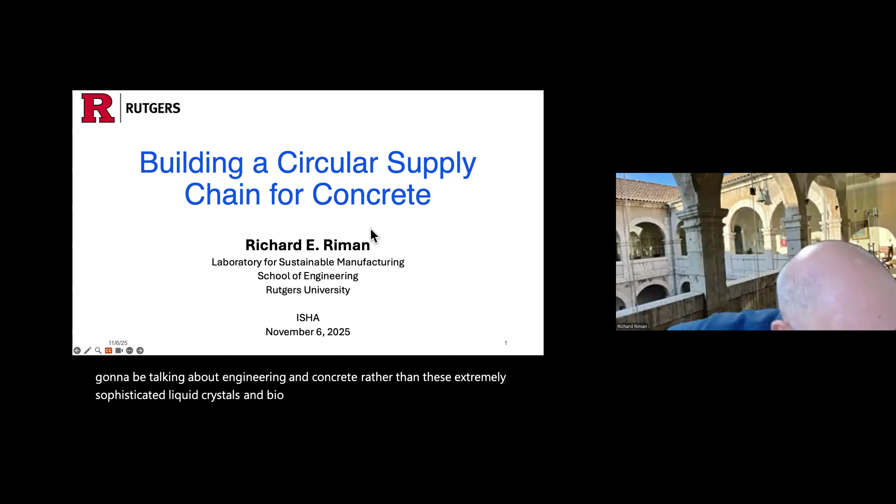I'm going to the other side of the spectrum here. I'm going to be talking about engineering and concrete rather than these extremely sophisticated liquid crystals and bio nanoparticles and enhanced solar absorbing materials. So let's go straight to first what the problem is that we're trying to solve.

As you've heard from our distinguished president of the United States, he thinks climate change is a hoax. So I want to first just talk about that for a moment.

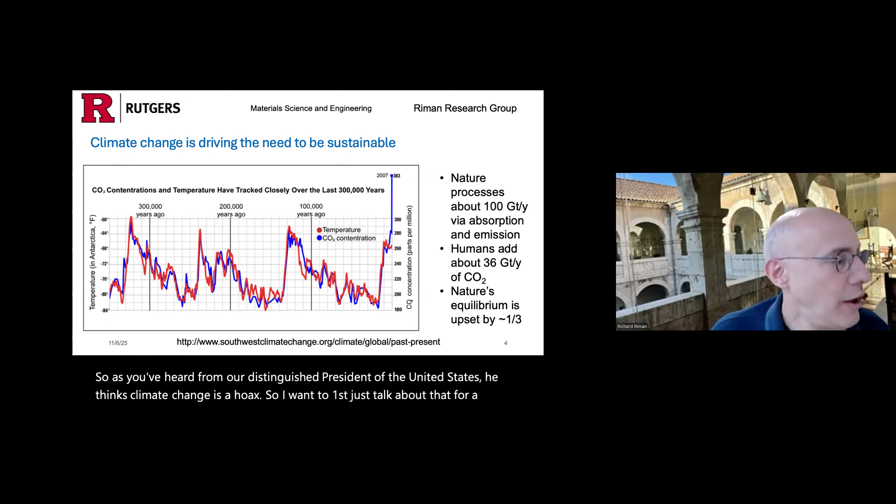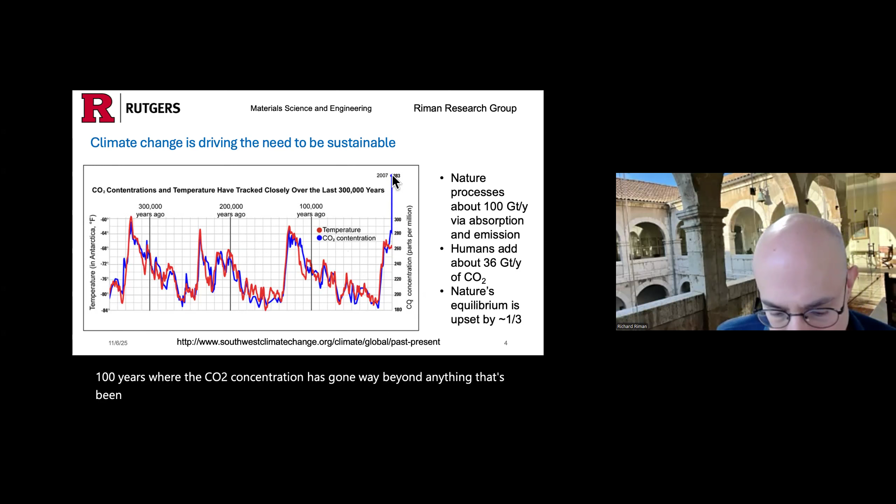This distribution of temperature and CO2 concentration has been experimentally documented. These are not people doing magic. They're taking these huge cylindrical sections out of the Antarctic area, and they're measuring the gas compositions and isotopes so they can actually determine what the temperature was like. As far as I know, they're almost back to 400,000 years ago. What you see is that the temperature has followed a similar trend to the CO2 concentration until we get to the last 100 years, where the CO2 concentration has gone way beyond anything that's been seen before in history. This is what I know from experimental data.

I've seen people come to me and say, no, the CO2 concentration has gone way up millions of years ago. And all I can say is, where is the experimental proof? All we know is for the last few hundred thousand years, it's been very predictable, the cyclings of temperature and CO2 content, and it isn't now.

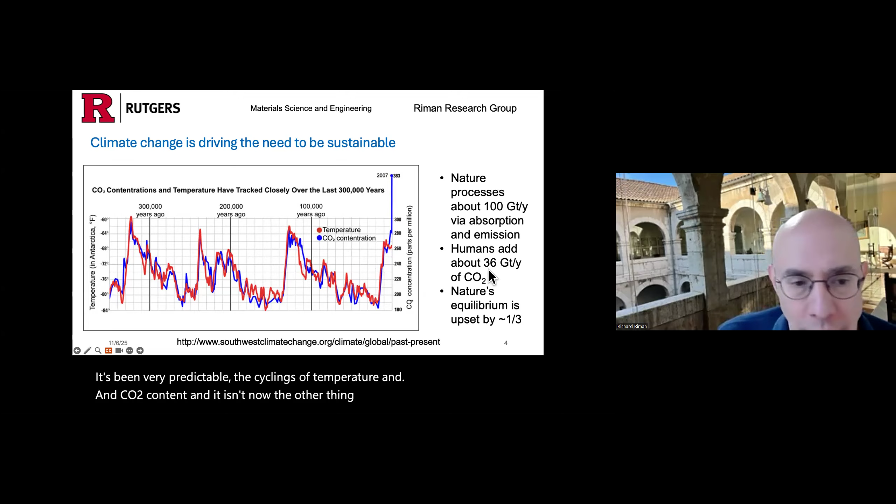We do know that we emit about 36 gigatons of CO2 a year. I think we're getting closer and closer to 40. We're emitting about a third of the amount of CO2 that nature emits. So the one question you have to ask yourself is if you have any kind of equilibrium process where you're changing the amount of gas that's being emitted by 30%, you have to believe that some sort of change is going to take place.

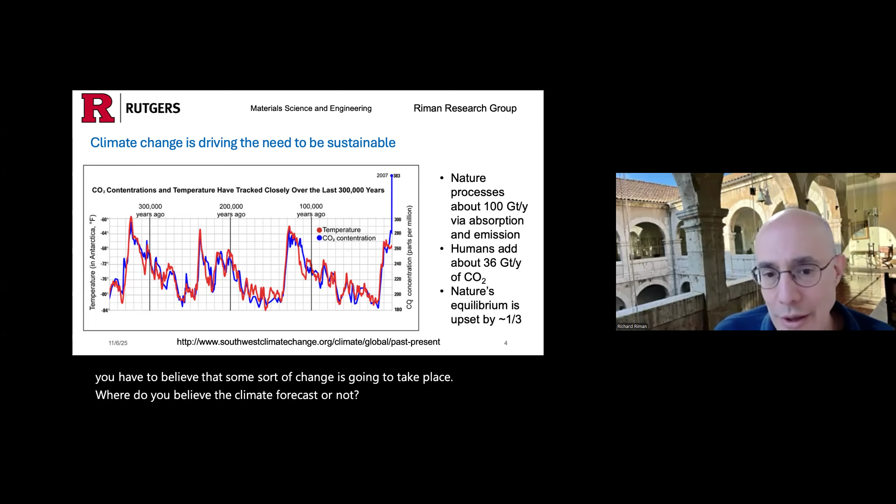Whether you believe the climate forecasts or not, it really doesn't matter. The point is that we're producing an abnormal amount of this gas for the first time, at least since we've been documenting the climate of the world. So I believe climate change has something to do with this CO2 concentration. We can argue about that over a beer.

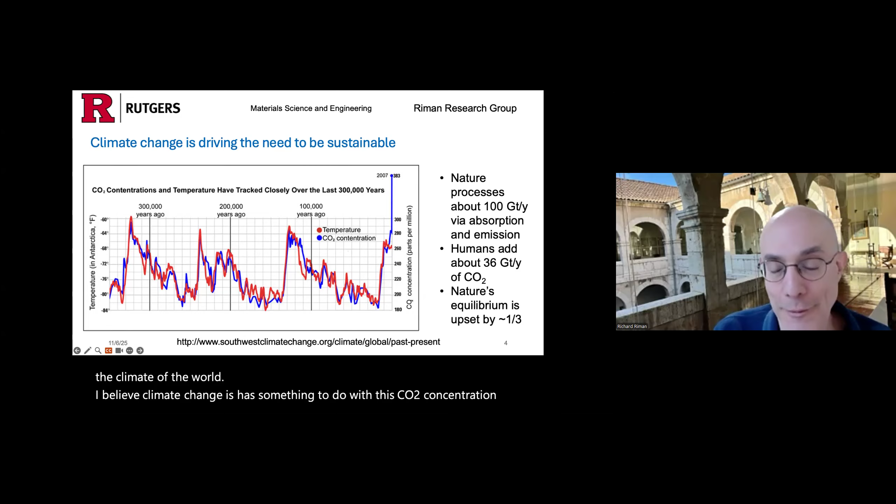The next slide, I just want to bring up how I view what I do as a faculty member. In about 2006, I committed all of my research to sustainability. Before that, I was working on biomedical materials, optical amplifiers, and piezoelectric materials, among other things. A lot of high-tech stuff. And I just dropped it all and started working in this area.

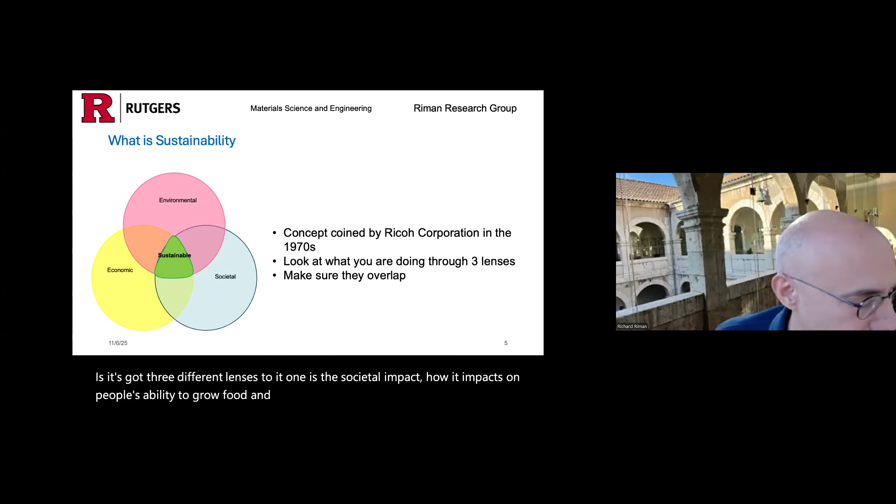What sustainability really is, it's got three different lenses to it. One is the societal impact, how it impacts on people's ability to grow food, and to be able to survive peacefully. As everybody has seen, we've had way too many wars about oil. Imagine what's going to happen if the climate goes out of control. I think things will get worse in that regard.

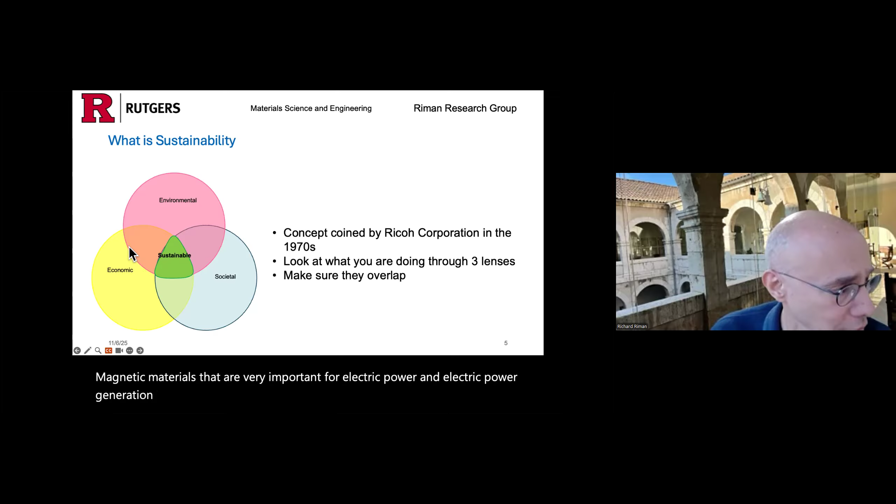There's economic aspects to it where, for example, even in magnetic materials that are very important for electric power and electric power generation, automobiles, etc., even the distribution of rare earth elements and their accessibility could lead to conflict. So there's economic aspects of it besides the fact that there's an environmental aspect.

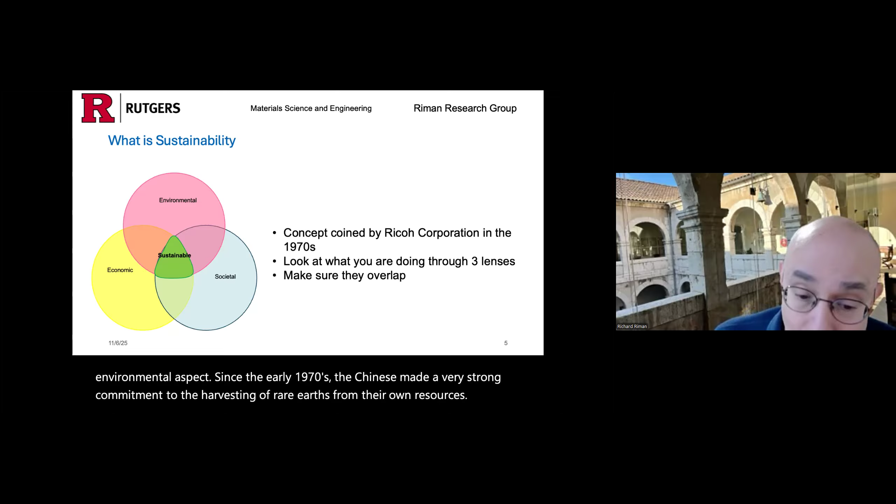Since the early 1970s, the Chinese made a very strong commitment to the harvesting of rare earths from their own resources. We can't fault them for being smart. They knew this was going to be important and they had long-term planning to do it.

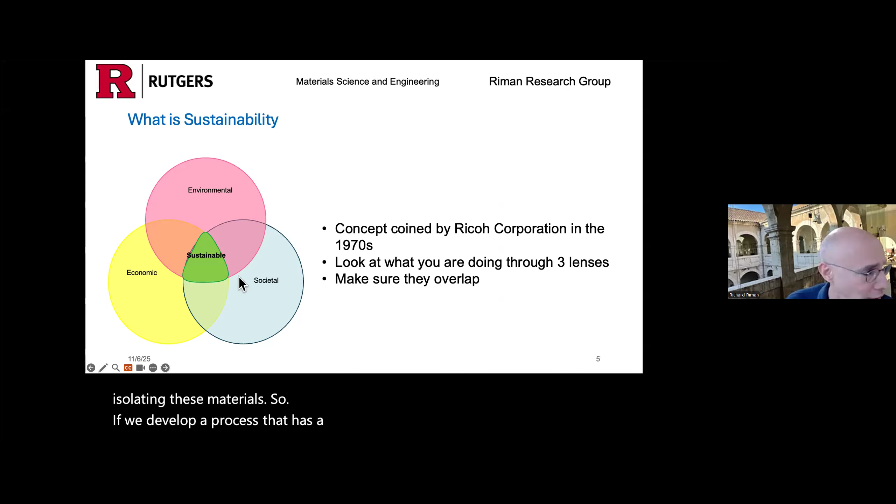The one thing they didn't do, though, is they did not take into account the environmental impact of processing rare earths, where there's some really seriously deadly organophosphates that they used and continue to use for isolating these materials. So if we develop a process that has a huge impact on the environment, it has economic impact and has

societal impact, that's what really creates what I call sustainability, and what the Ricoh Corporation from Japan was the first to define in the 70s.

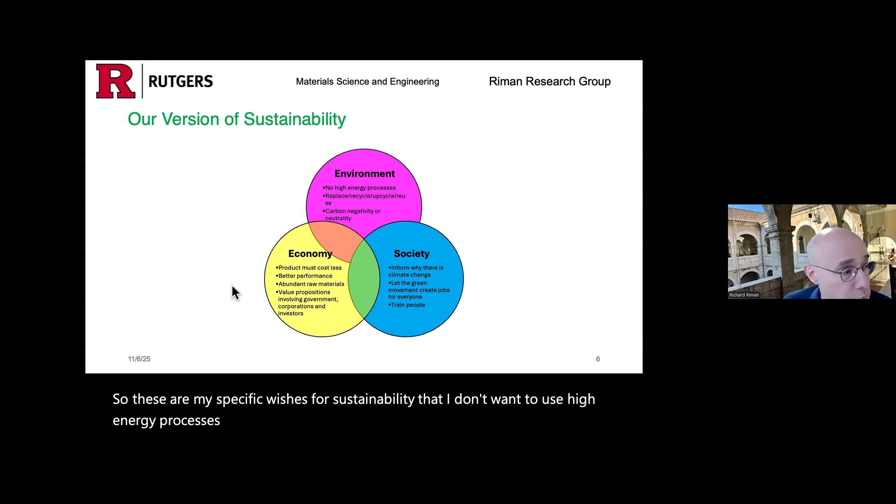So these are my specific wishes for sustainability: that I don't want to use high energy processes. I want to introduce recycling wherever it's possible. And I want to introduce the concept of carbon negativity, meaning the ability to use more carbon than you generated in the process of manufacturing a product.

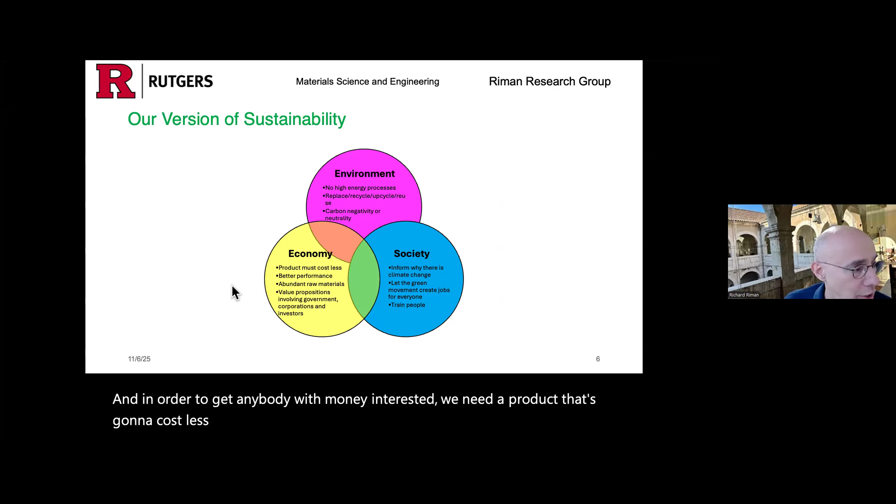And in order to get anybody with money interested, we need a product that's going to cost less than what the incumbent technology offers, and it needs to perform better. And then if we want the world to adopt it, then we need to work with raw materials that everyone has, not specialized materials that can only be used in one part of the world, perhaps.

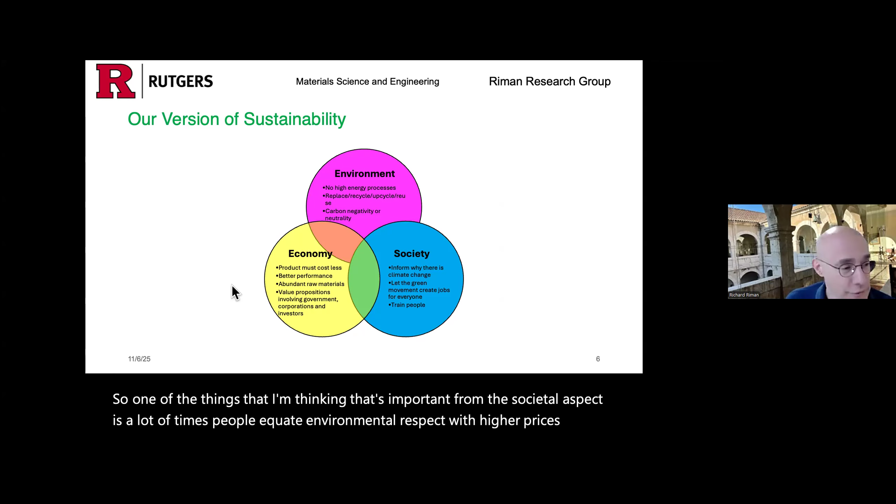So one of the things that I'm thinking that's important from the societal aspect is a lot of times people equate environmental respect with higher prices and penalties on companies. What I'm trying to do is create what I like to call greed-based initiatives, where people who only care about money will do it because they can make money.

And I don't personally believe in that, but I believe to get people with money to cooperate, you have to basically attract them like a mouse is attracted to cheese. So that means you have to really get to a point where you have something that's practicable and profitable.

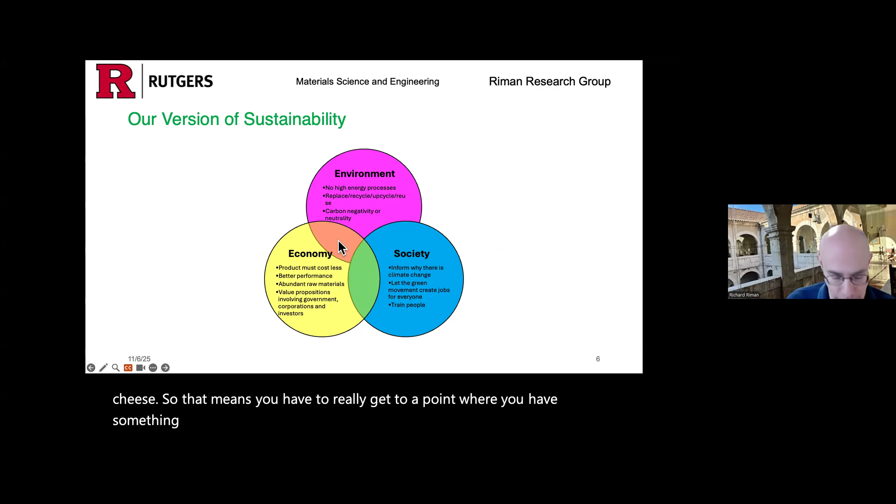So there's a lot of different climate tech problems you can choose from. My interest is in carbon capture and carbon utilization. And I'm interested in having concrete utilize CO2. At the same time, I'm going to show you how I can use the cement and concrete industry to also create a network that supplies CO2. So I'm trying to solve these two problems at the same time.

And what's interesting is when you look at the whole climate tech area, it's a market that's growing really quickly. By 2030, the market's going to be easily above $1 trillion, which is about the size of the concrete market currently.

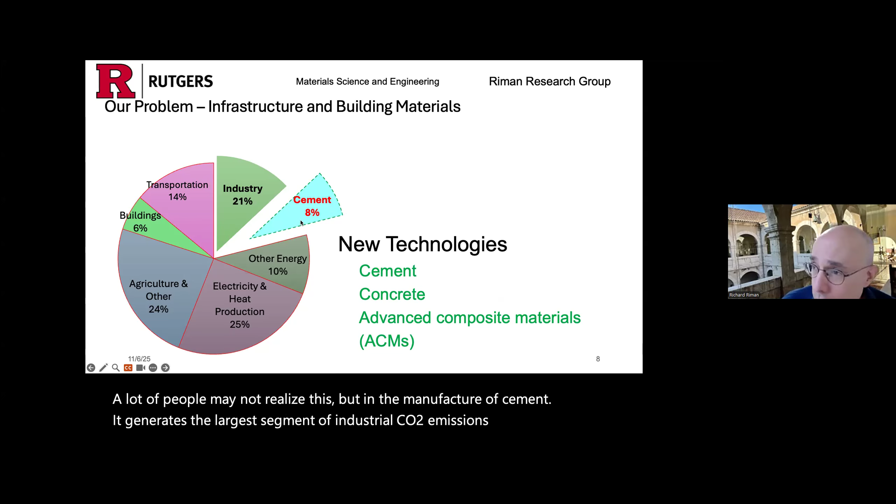So why pick on cement? Well, a lot of people may not realize this, but in the manufacture of cement, it generates the largest segment of industrial CO2 emissions, bigger than even steel manufacture, where when you make steel, you're adding iron ore and carbon, and you're burning up all that carbon so you can reduce the +2 and +3 states of iron-based minerals to the metallic state. But nope, cement emits more, and the main reason is because we use so much of it.

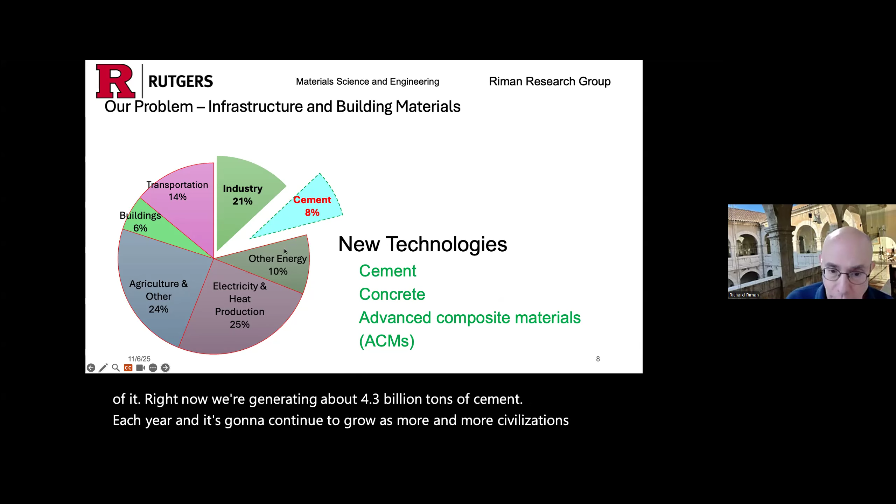Right now, we're generating about 4.3 billion tons of cement each year. And it's going to continue to grow as more and more civilizations use cement. Now, the manufacture of cement is a very large scale process. A typical cement mill will generate about 2,000 tons of cement a day. And it costs the cement mill approximately $1 million a day for their manufacturing process.

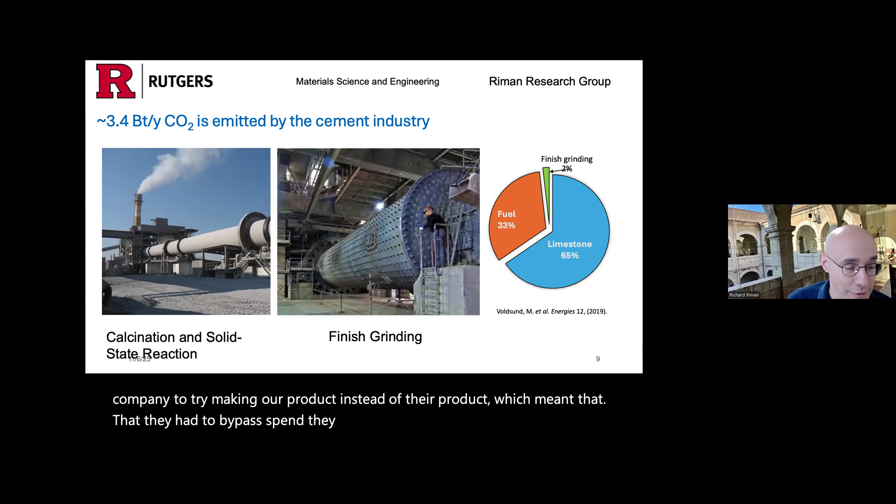So later on, I'm going to show you that I did a trial at a full-scale cement plant, and we'll tell you about some of the results we got there. But the key thing is that we actually were able to get to a point where we convinced the cement company to try making our product instead of their product, which meant that they basically spent $1 million just to do that demonstration.

So there are high temperature processes, which I'll get more into, and then there are what we call finish grinding processes. So you can imagine, this process is running at about 1600 degrees Celsius, or maybe as low as 1450. And you can imagine this process is basically a device that spins with these large rocks inside that are designed to crush the cement into a fine powder.

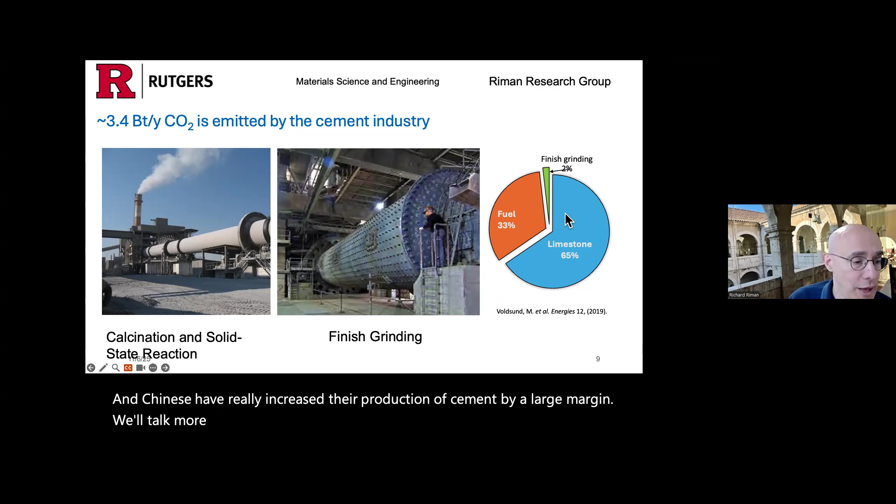So if you look at the actual contributions to CO2, it's approximately 3.4 billion tons a year. I would argue that it's probably close to 4 billion tons a year now because this data is like 2019 data, and the Chinese have really increased their production of cement by a large margin. We'll talk more about why limestone emits more CO2 than the fuel used to heat it or running the mill itself.

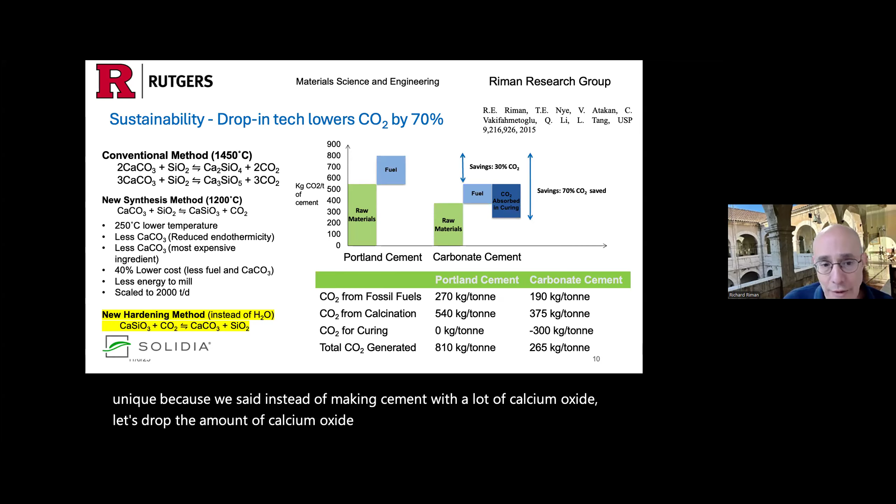But first, I'm going to tell you about the technology that we've created. It's very unique because instead of making cement with a lot of calcium oxide, we dropped the amount we're using by a factor of 3. By doing that, you lower the energy, because typically making Portland cement requires adding approximately 2 to 3 calcium carbonates for every silica. The blend of tricalcium silicate and dicalcium silicate is what makes up Portland cement. A typical mixture, at least in the US, is made at 1450 degrees, but it could be as high as 1600.

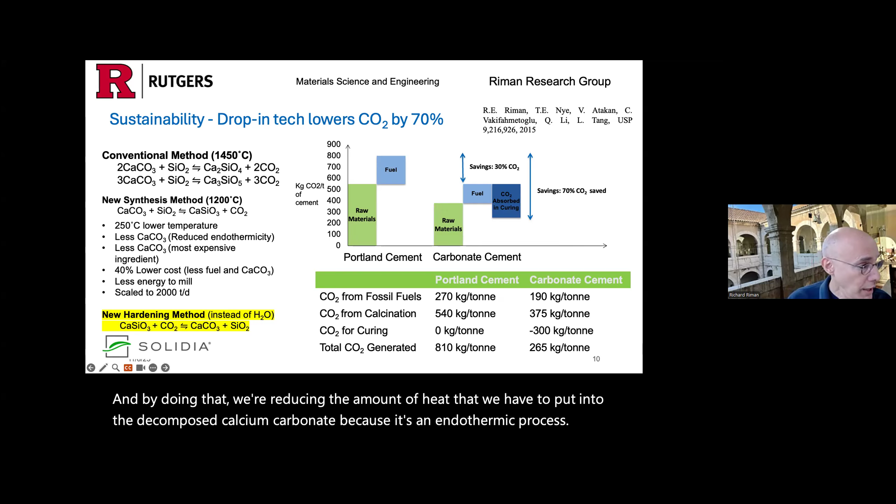We basically said, let's dial down the amount of limestone and lower the temperature by 250 degrees. By doing that, we're reducing the amount of heat needed to decompose the calcium carbonate, since it's an endothermic process. It's also the most expensive ingredient, so we're also reducing the price of the cement.

So with just small changes, we managed to lower the cost of cement by 40%. It was interesting because when I first went to cement companies and talked about this idea, they thought I was out of my mind and that I would never make anything cheaper than what they're able to make. But on the first day we went to do this at a cement plant, we already convinced them they were wrong, and we were able to scale this process to 2,000 tons per day.

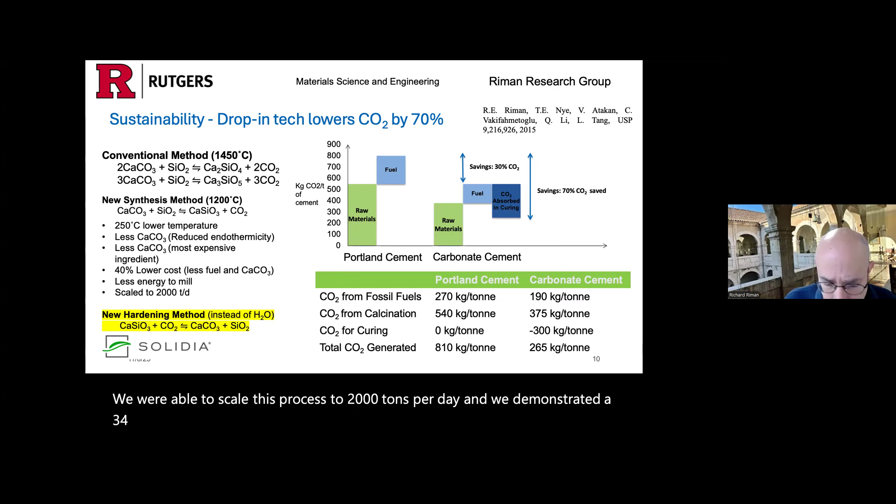We demonstrated a 34% reduction in energy on the first day, and we also demonstrated a 40% reduction in CO2 emissions. So if you think we're emitting 4 billion tons of CO2 now, imagine being able to take off nearly 2 gigatons of CO2 per year from the cement business.

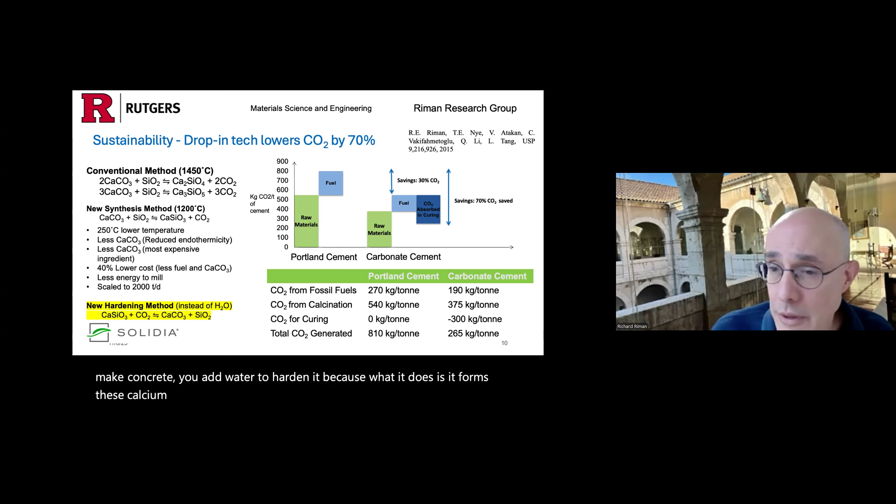The reason the cement industry has never done this before is that usually when you take what's called calcium monosilicate, it does not react with water. We all know that when you make concrete, you add water to harden it, because it forms calcium silicate hydrates that create a bonding structure holding together the sand and gravel that makes up concrete. What we basically said is we want to make something that hardens with CO2 instead. By doing that, our bonding agent is actually calcite, or calcium carbonate, and silica instead of these calcium silicate hydrates.

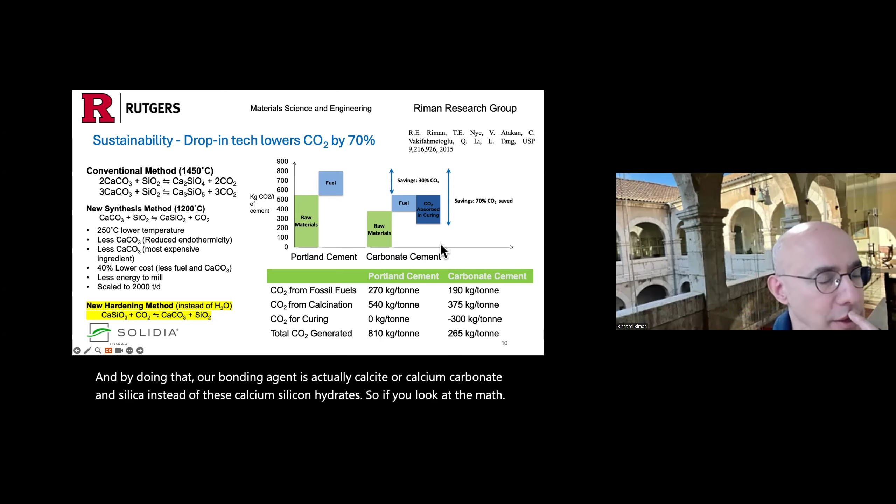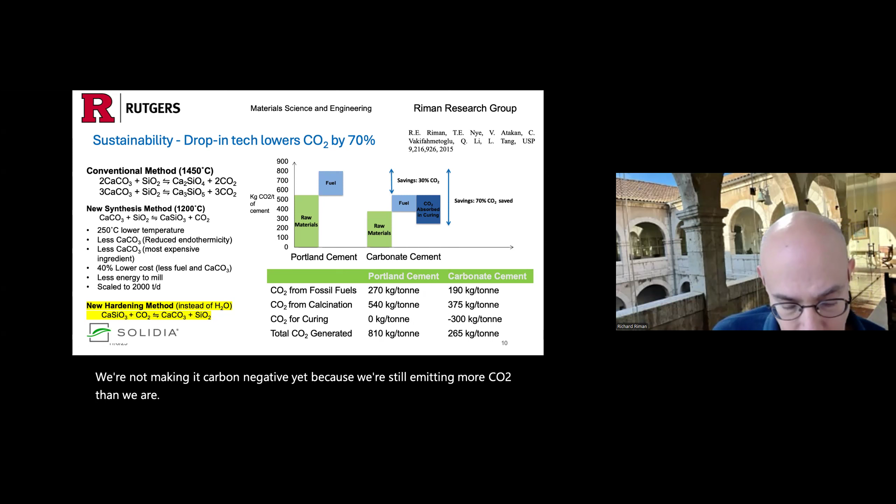If you look at the math, at the end of the day, we estimated that we could reduce CO2 emissions at a cement plant by utilizing the CO2 and avoiding CO2 emissions by 70%, while also reducing the energy by about 30%. We're adding CO2 to the system, so we're not making it carbon negative yet, because we're still emitting more CO2 than we're taking into the structure. But it's a big improvement over what could be done if it were deployed on a worldwide scale.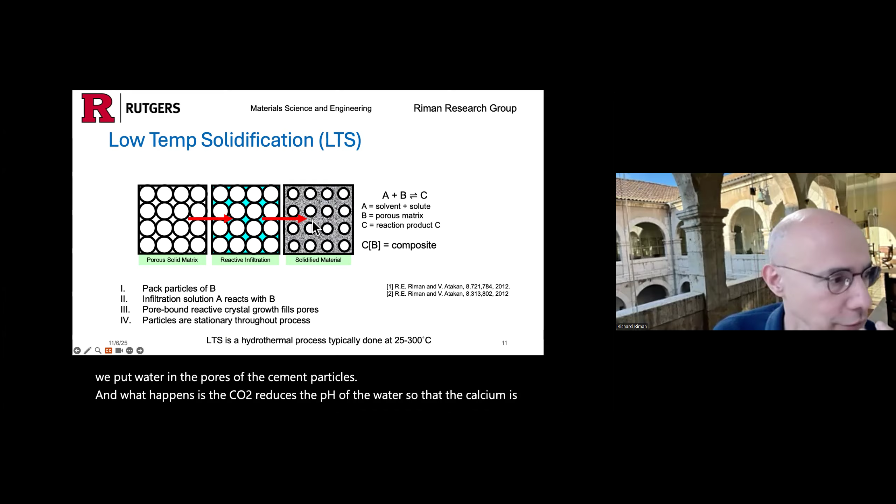So I want to explain a little about how the CO2 works. These materials literally breathe in CO2 like we breathe in oxygen. The idea is we put water in the pores of these cement particles, and the CO2 reduces the pH of the water so that the calcium is leached out of the particles and we form a network of carbonate. We're left with particles that are basically calcium-depleted calcium silicate, so they might have an unreacted core of material with a coating of a silica-rich rim.

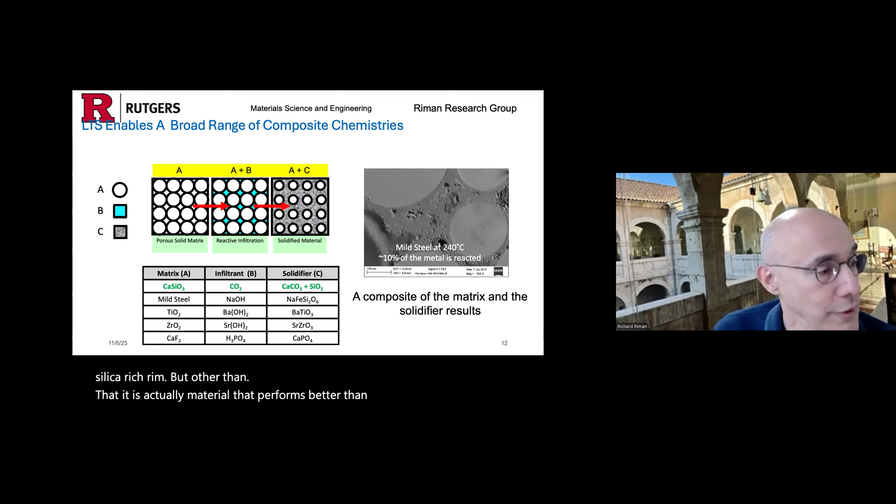But other than that, it's actually a material that performs better than Portland cement, and I'll show you that in a moment. This is just a pictorial representation of the process. We have to create open pores in the structure by removing enough water to begin forming open pores, creating a structure with a silica-rich layer along with a massive network of calcium carbonate that holds everything together. We patented that structure because nobody had ever patented a structure like that which can create mechanical stability.

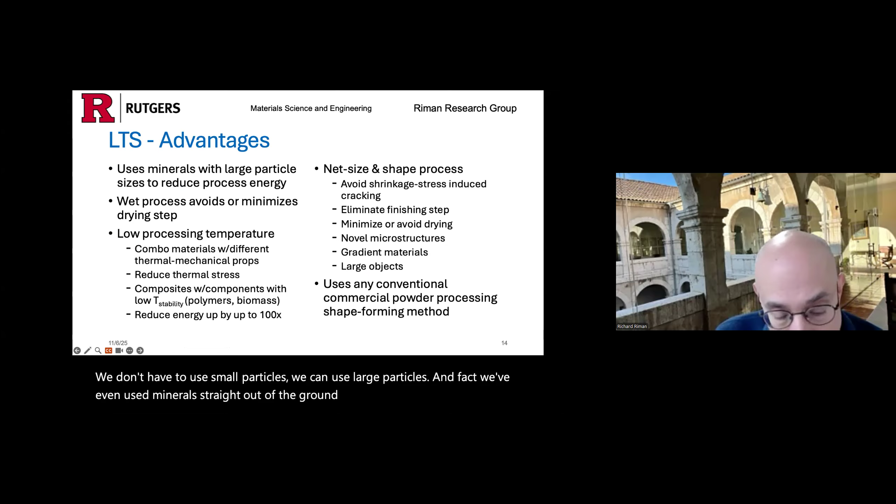So we call this process low temperature solidification, or LTS. There are a lot of advantages. First of all, we don't have to use small particles, we can use large particles, and in fact we've even used minerals straight out of the ground that will actually bond together. Some parts of the world have a lot of monocalcium silicate, like Afghanistan, Mexico, and the United States. We can process with water, and because it doesn't hydrate, the material doesn't solidify until the CO2 is introduced. The carbonation process is very rapid — from start to finish, we can make a product that's ready to use in about 6 hours.

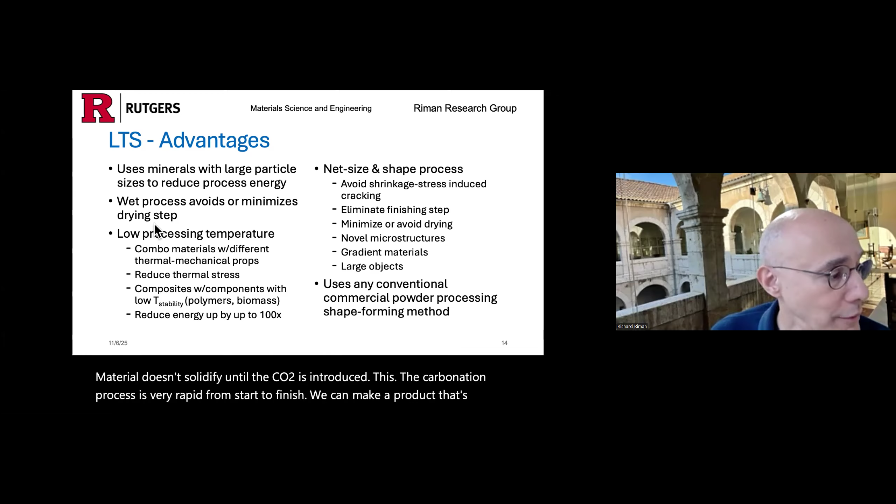While with using Portland cement, you have to wait at least 3 days before you can even walk on it. Portland cement shrinks. Our process doesn't show any shrinkage, so you can make really large objects and not see the typical cracks that you might see in a concrete structure, which gives rise to all kinds of new materials that you might be able to make this way, which I won't talk about today, but we've got some very interesting materials that have other uses.

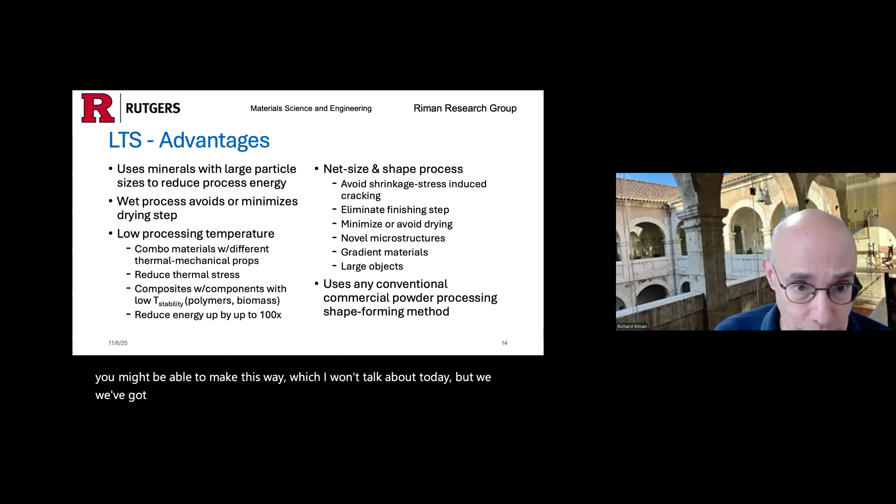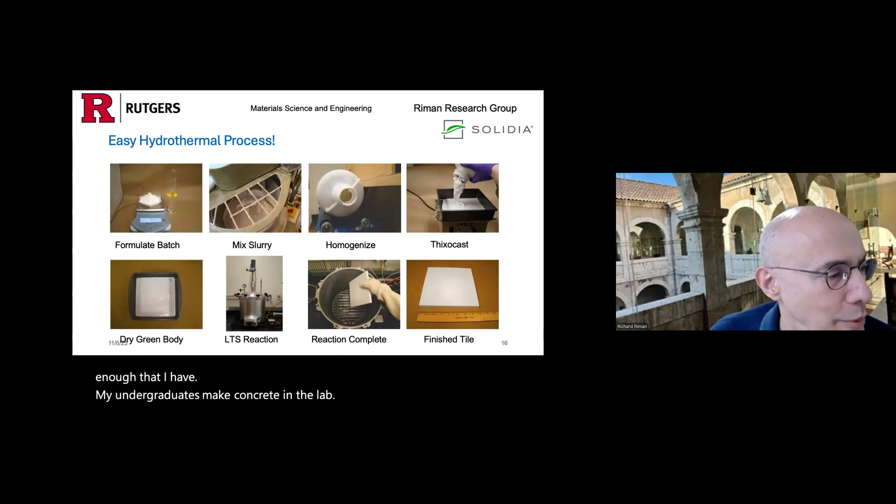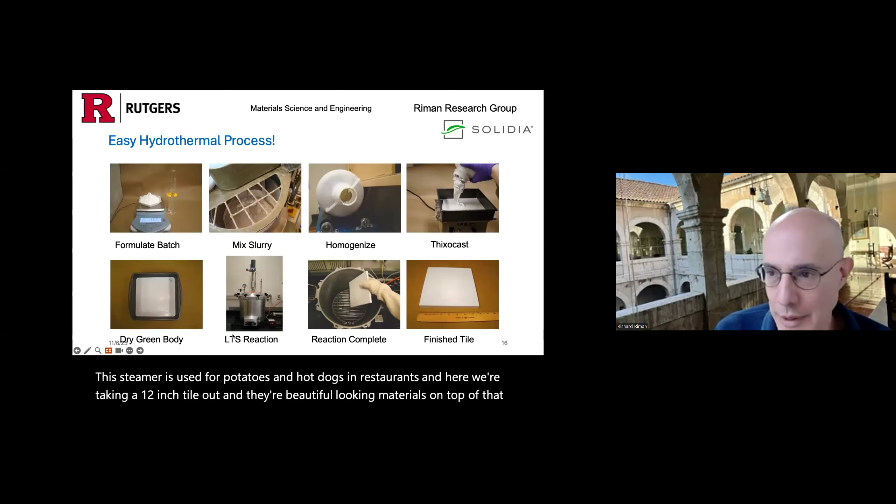The process is easy enough that I have my undergraduates make concrete in the lab and compare it to Portland cement, then I have them break the two materials to compare their strengths. My material is always stronger than the Portland cement material. We literally use a cake pan to make a tile, and this steamer used for potatoes and hot dogs in restaurants. Here we're taking a 12-inch tile out, and they're beautiful looking materials on top of that because calcium carbonate gives materials a white appearance.

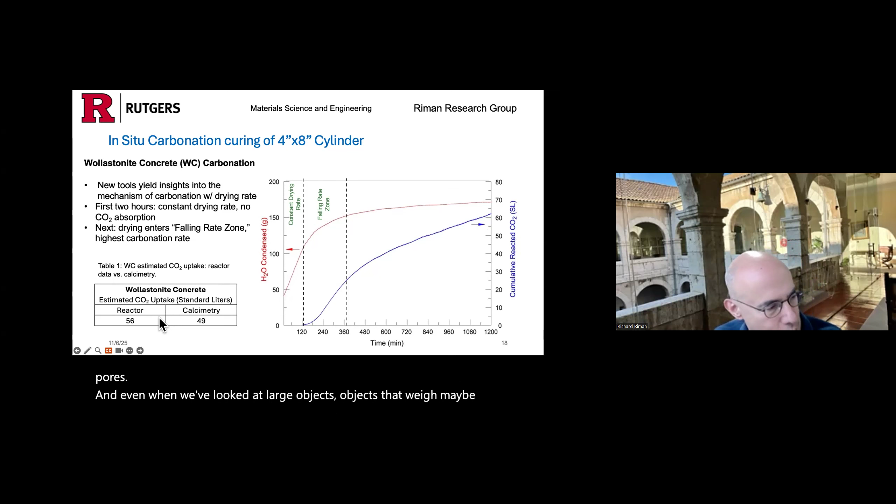Even when we've looked at large objects, objects that weigh maybe 20 to 30 pounds, our reactor can measure the CO2 pretty close to what we measure when we use chemical methods for extracting the CO2 and measuring how much is actually in there. Usually, when we measure the amount of CO2, we do it 3 different ways, and they're usually within 1% of one another. But this is for the large reactor where we're cooking a lot of different materials at the same time.

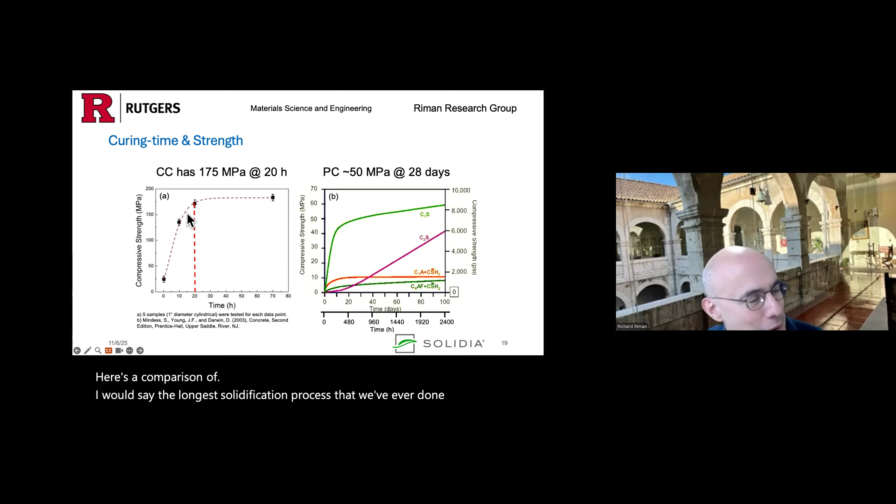Here's a comparison of, I would say, the longest solidification process that we've ever done, because for a while we would just leave these things in overnight and check on them. Then we discovered that once we really learned how to do this well, we can even solidify a material in as little as 40 minutes. And again, it's full strength—it doesn't gain strength later on like cement and concrete.

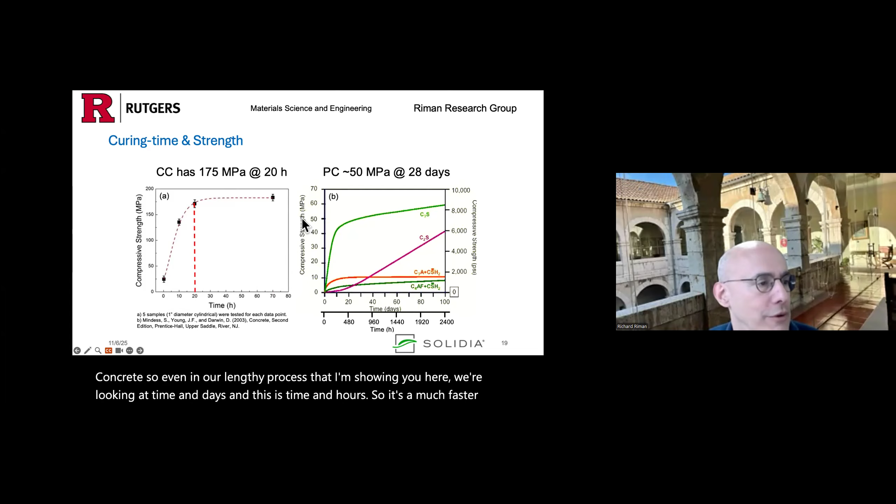So even in our lengthy process that I'm showing you here, we're looking at time in days, and this is time in hours, so it's a much faster process. Also, look at the compressive strengths that we can get—we're getting close to 200 megapascals, and this was one of the very first trials we ever ran. While Portland cement, you're lucky if you can get up to 60 megapascals, or 1/3 of the strength.

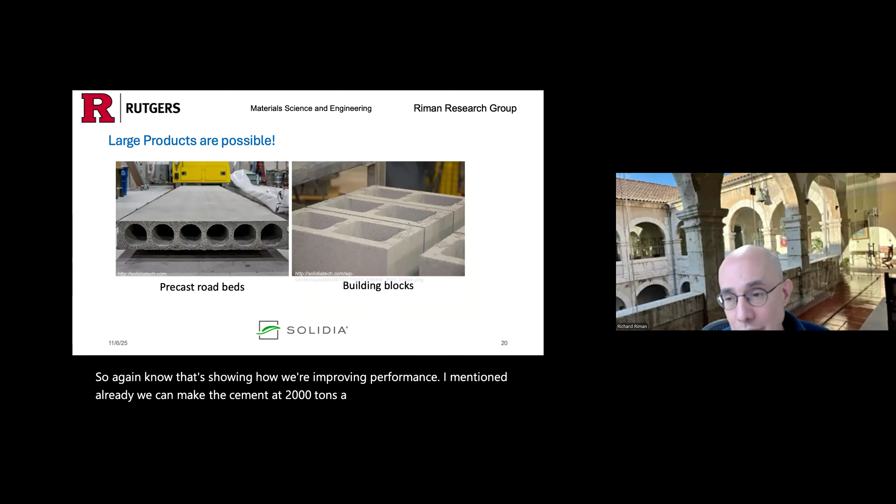So again, that's showing how we're improving performance. I mentioned already we can make the cement at 2,000 tons a day, 40% cheaper. Here's an example of construction products that have been made this way—this is a hollow core building slab that's used for parking decks in the United States.

This is what we call a concrete masonry unit, or a CMU. I call them cinder blocks—maybe that's a New Jersey term. But we can make a slab like this: it's 30 feet long, 5 feet wide, and 8 inches thick, and it's ready to use in 6 hours.

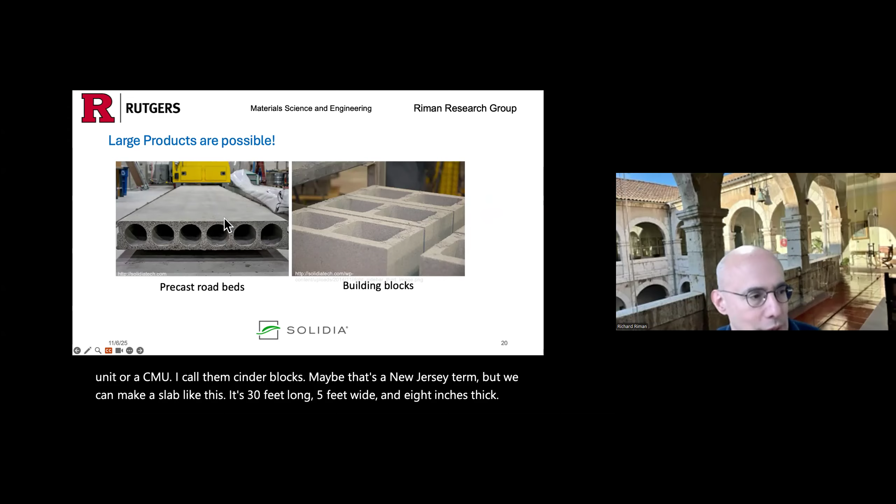These are some of the performance properties of the material. This was the very first measurements we ever made on these materials, and the most important thing you see here is that we've gotten close to 10,000 PSI, which is great for a concrete material—it puts us in the highest category of high performance concrete categories.

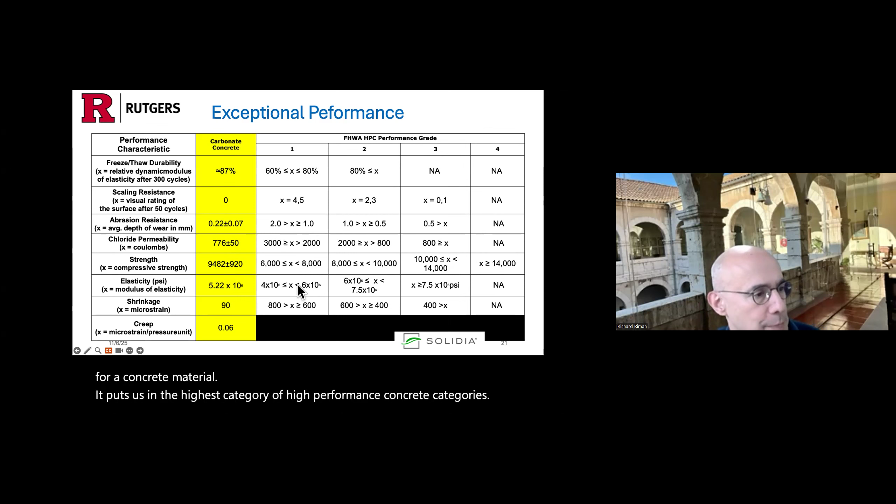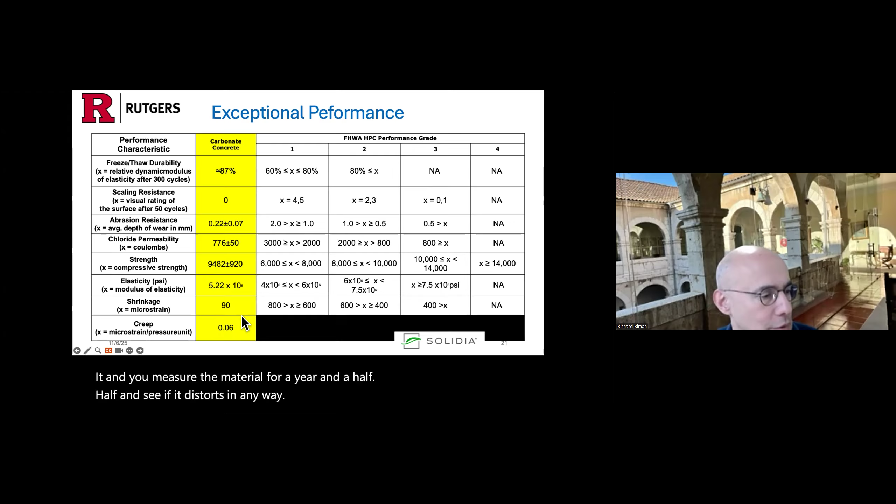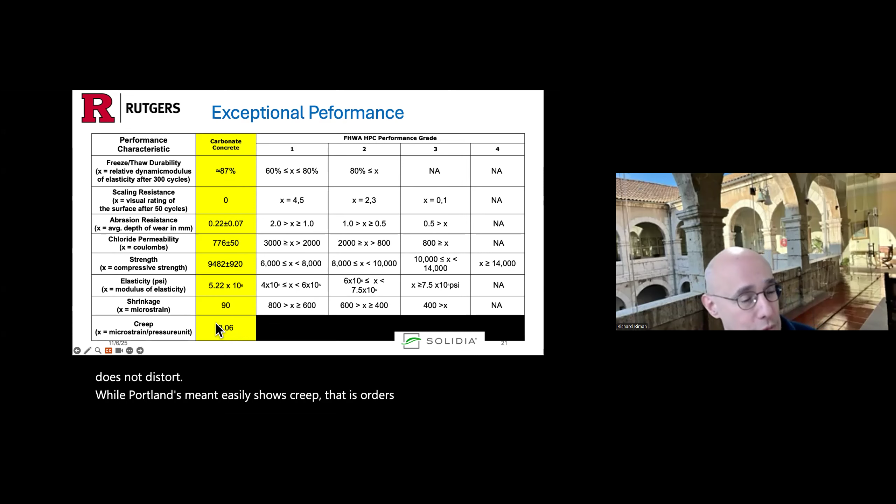And the shrinkage that you measure is literally an order of magnitude smaller than anything you've seen with Portland cement concrete. Most important, there's this property called creep. When you measure creep, you apply 1/3 of the fracturing stress on the concrete, then take it and measure the material for a year and a half to see if it distorts in any way. This measurement that we made is literally in microstrain—it's in the noise or measurement uncertainty, meaning the material does not distort. While Portland cement easily shows creep that is orders of magnitude greater. So imagine how fast we can do construction if we started using material like this.

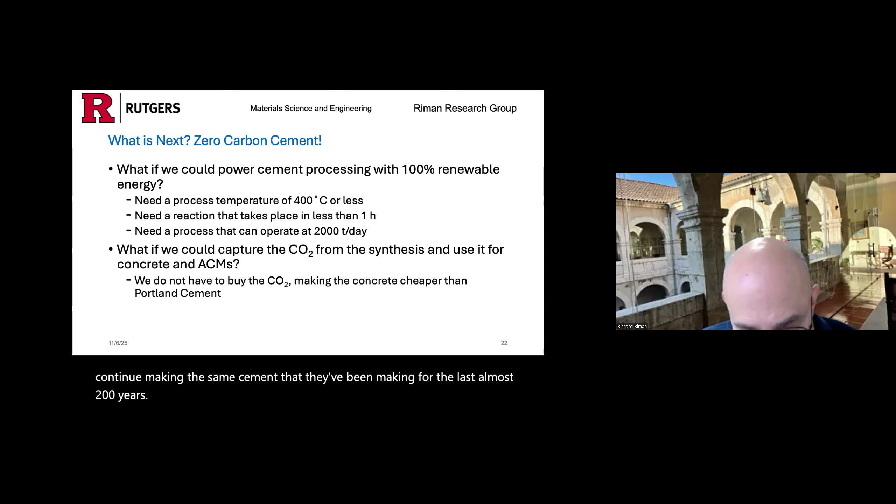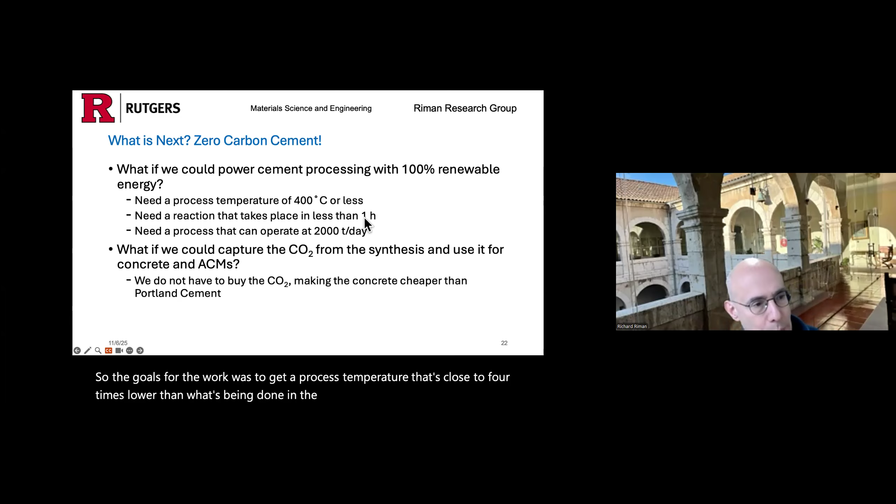So what's next? Well, I'm not really happy that we can make cement at an ordinary cement mill because, quite frankly, the cement industry doesn't really want to do this. They want to continue making the same cement that they've been making for the last almost 200 years. So they're trying everything but doing this. During the questions session, I can answer what they're actually trying to do to reduce CO2 emissions. But I thought, if they won't make the material out of a cement plant, then I'm going to invent a process that's simpler and cheaper than what they can do. So the goals for the work were to get a process temperature close to 4 times lower than what's being done in the industry, make the product as fast as they can, which takes about an hour to make, and develop a process that can go to 2,000 tons per day.

In the process of doing that, because we're decomposing carbonate, we still have CO2 being generated, but why not use that CO2 for hardening the material? Then we'll have a zero emissions process. So that's what we set out to do.

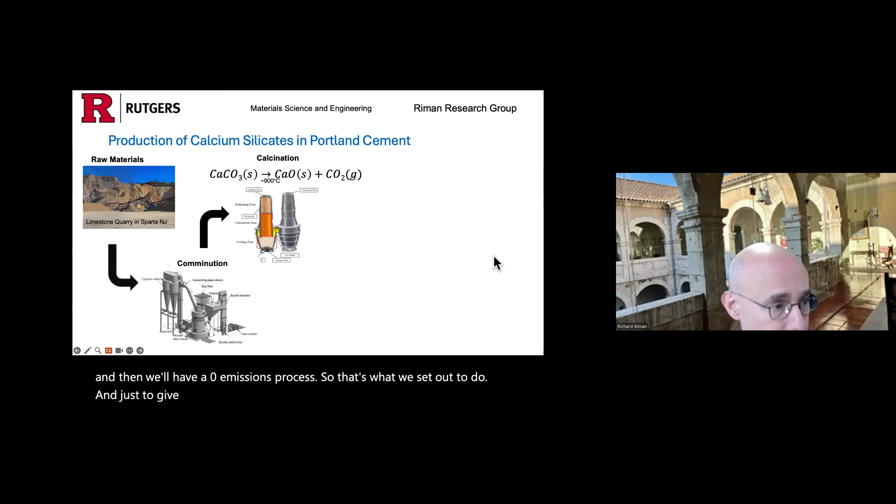Just to give you a perspective on how cement is made, here's a chart that describes it. First, most cement mills are located near limestone quarries. Then they grind the materials to a fine size. Then they calcine the calcium carbonate separately or all together, but in this case separately, at about 900 degrees. Then they do a reaction with the calcium oxide and the silica to make the cement product.

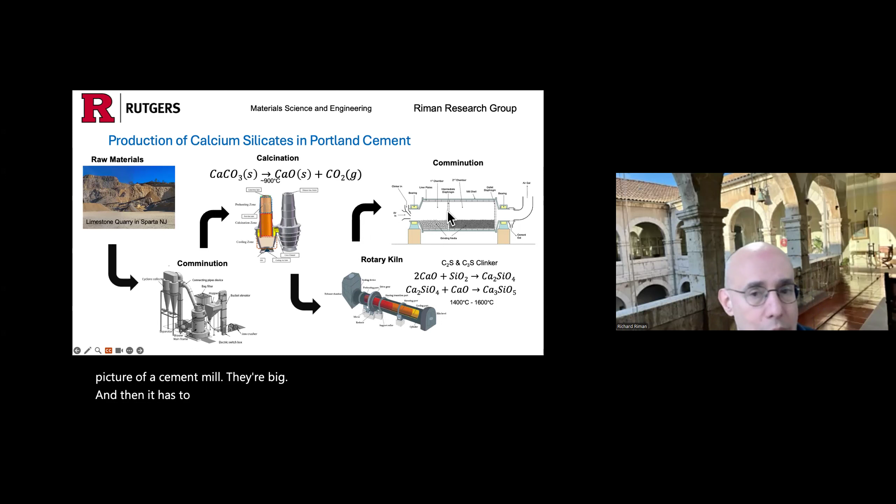I showed you a picture of a cement mill. They're big. And then it has to be ground. The reason why it has to be ground is because you make this product called clinker. These structures are about 2 to 3 inches in diameter, and they have to be ground in order to turn it into a powder. So that takes electricity as well.

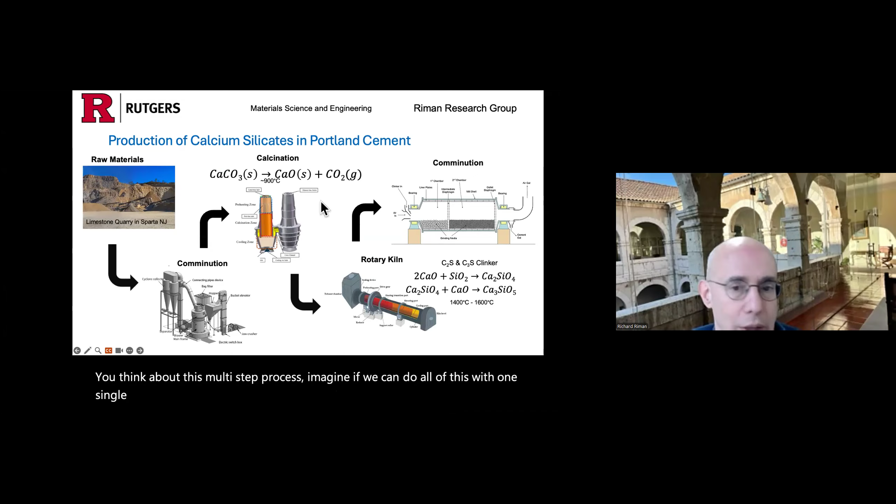So one of the things we instantly saw is that if we can do a low temperature process, we can even avoid the formation of clinker. So you think about this multi-step process. Imagine if we can do all of this with one single step. And the answer is we can.

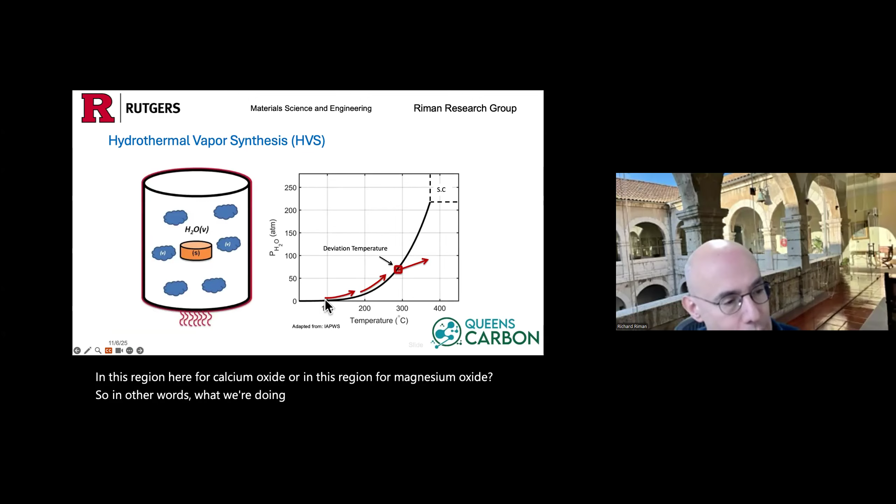In other words, what we're doing is we're throwing literally a few drops of water into the reactor. Once the water completely evaporates, we're now in the gas phase, and we're going off into this region where instead of making calcium hydroxide, we're making calcium oxide. So that's our operating range that we can work within. And we're way below any kind of condition that turns water supercritical.

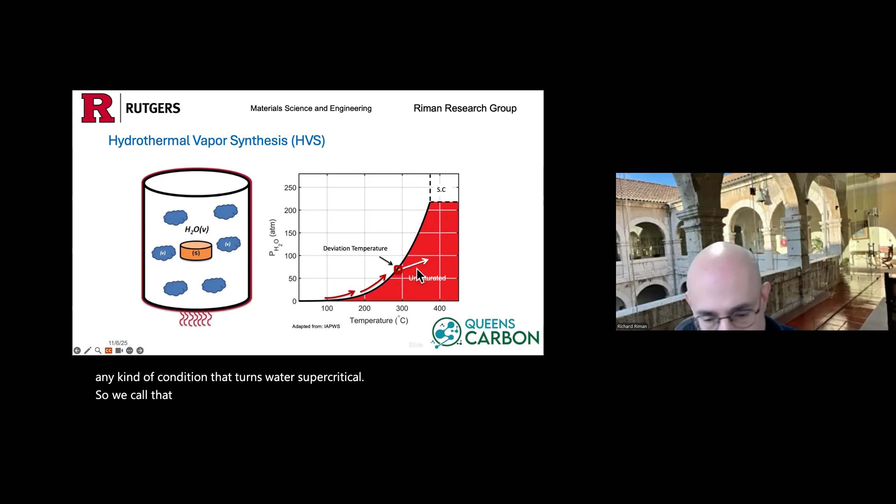So we call that unsaturated, which is basically another way of saying we have very low relative humidity. If you're actually working where water coexists, like when it's raining out, you're along this curve. And the calcium silicates will not form if you're on this curve. Instead, you'll form hydroxides, and hydroxides make terrible cement.

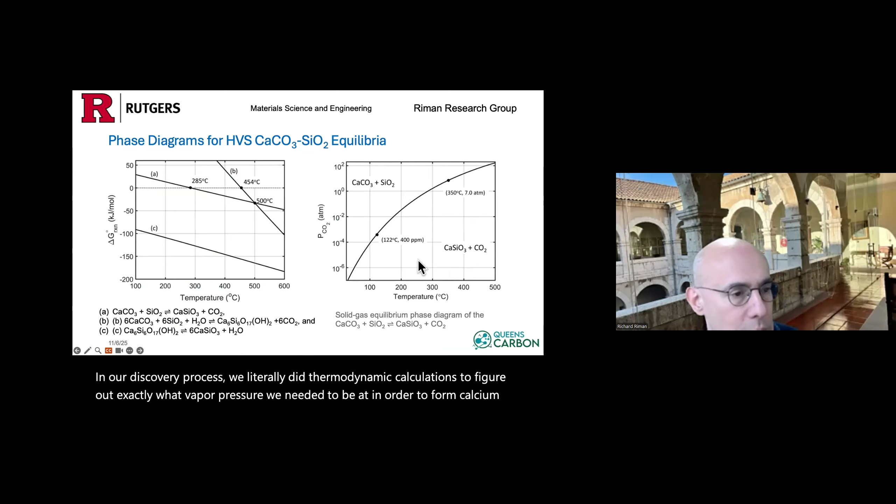So in our discovery process, we literally did thermodynamic calculations to figure out exactly what vapor pressure we needed to be at in order to form calcium monosilicate. And what we discovered is that we can pretty much operate at any temperature above 300 degrees C.

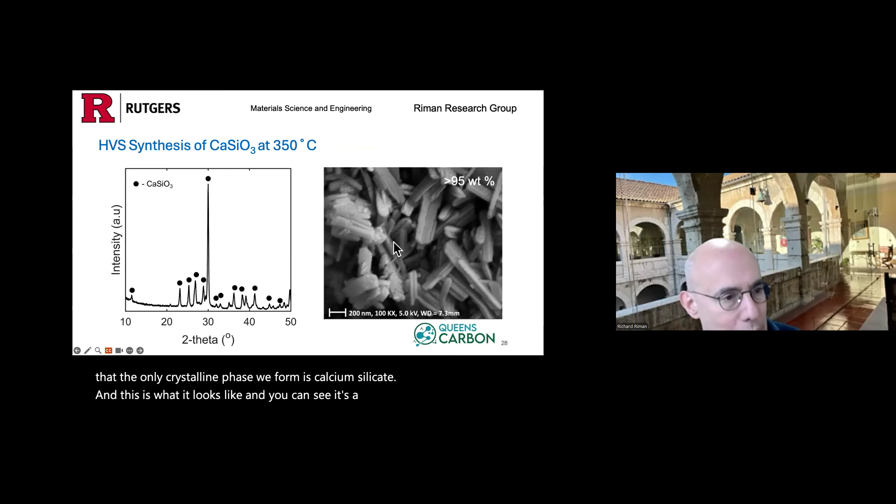And so this is what's called an X-ray diffraction pattern. It basically shows you that the only crystalline phase we form is calcium silicate. And this is what it looks like. You can see it's a submicron powder, more of a platelet-like structure. But this is made directly out of the reactor. No high temperature process is required.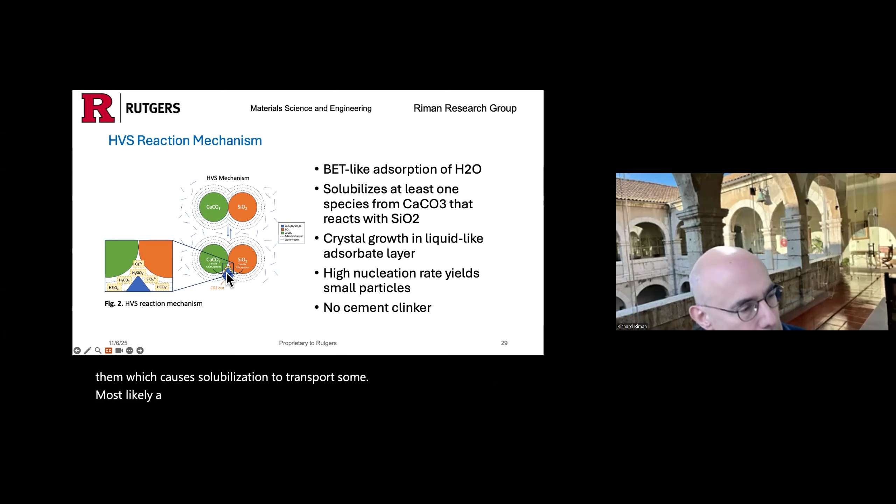And we believe the mechanism by which this forms is that water adsorbs onto the surface of the particles, and adsorption layers have a liquid-like behavior to them, which causes solubilization to transport some, most likely a calcium species, over to the silica solid, and then grow the calcium silicate in the adsorbate layer that exists there. And we don't have any proof for that. We're hoping we get some research funding so we can prove that we understand the mechanism.

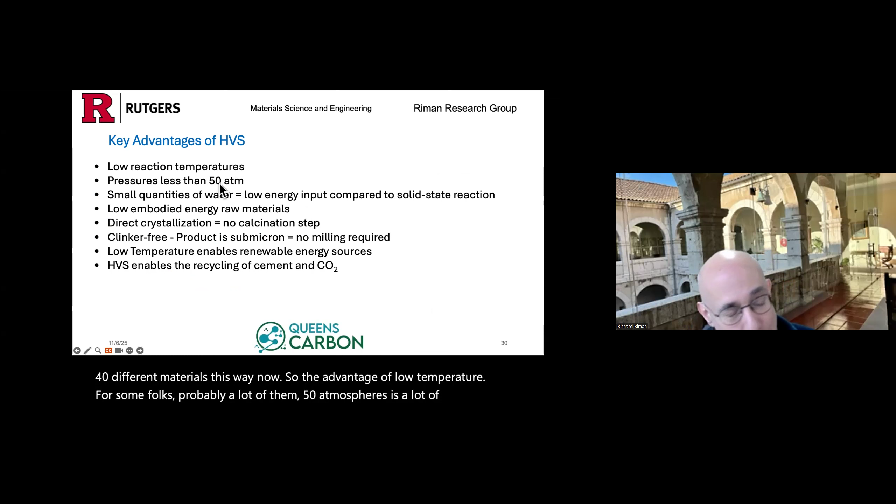We found that we can make a lot of other ceramic phases this way as well. We've made close to 40 different materials this way now. So the advantage of low temperature, for some folks, probably a lot of them, 50 atmospheres is a lot of pressure. We're looking at reducing this pressure and creating strategies for doing that.

We use very, very small amounts of water, so we don't have to evaporate a lot of water. We're using raw materials straight out of the ground. It makes the phase that we want directly. We don't have to calcine it. We don't have to grind it. And because the temperature is below 400 degrees, we can use renewable energy like phase change salts to power the

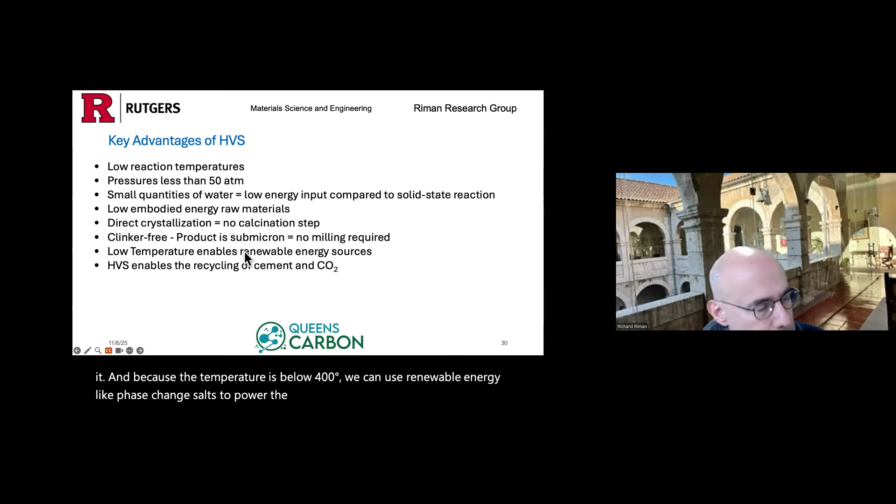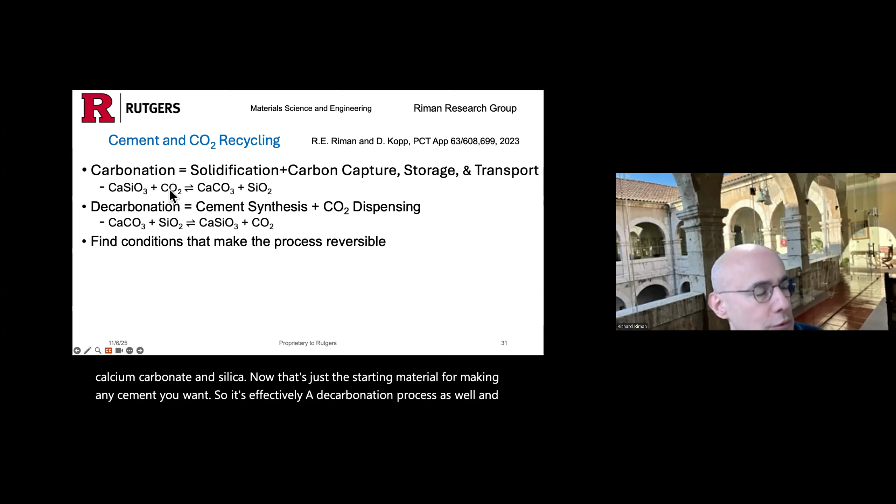process instead of using fossil fuels. The last point is this also creates what we call a recyclable material. When we're carbonating, we're adding CO2 to the system to make a mixture of calcium carbonate and silica. That's just the starting material for making any cement you want. So it's effectively a decarbonation process as well. We can use the carbonation process to capture carbon, store it, and transport it instead of using compressed gases and liquids, and use the cement synthesis process as a way of dispensing the CO2.

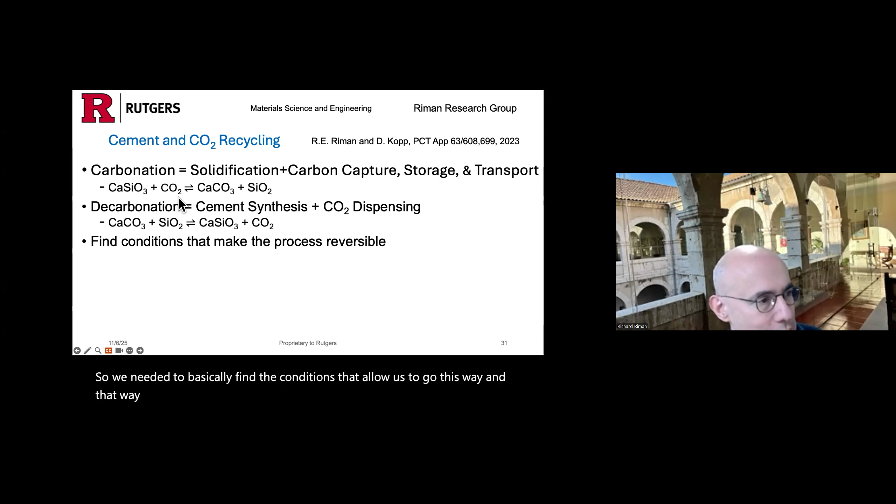So instead of using a compressor to get to a certain pressure of CO2, we can use temperature instead. We needed to basically find the conditions that allow us to go this way and that way, which is basically taking the reaction in the forward and the reverse direction.

This was one of the first results we got, which basically showed that after we have calcium carbonate and silica, we turn it into calcium silicate, we add CO2, we make cement again, add CO2, and this is one that shows we could go through basically 5 cycles and pretty much emit and give somewhere in the order of about 60% of the CO2 when cycling it. Likely we'll be able to do much better than this.

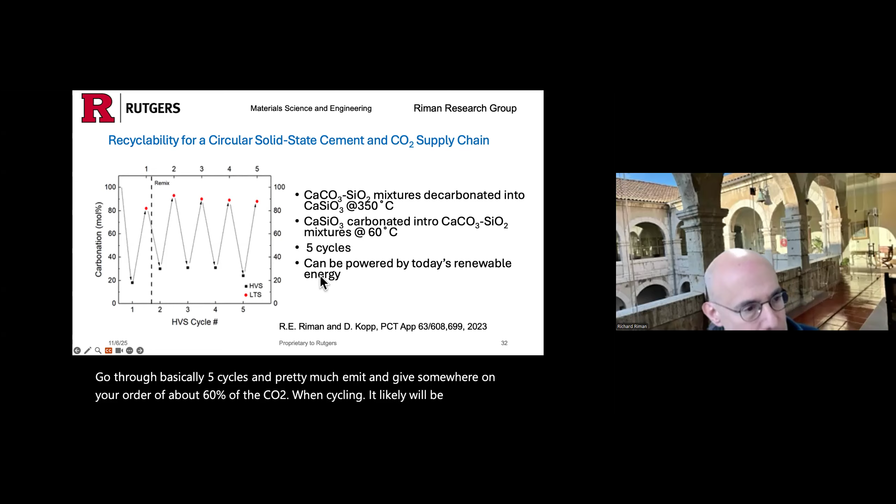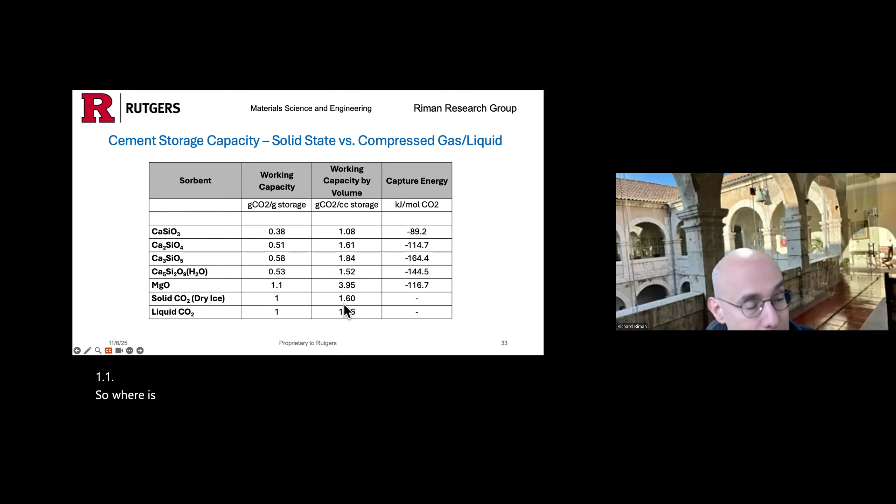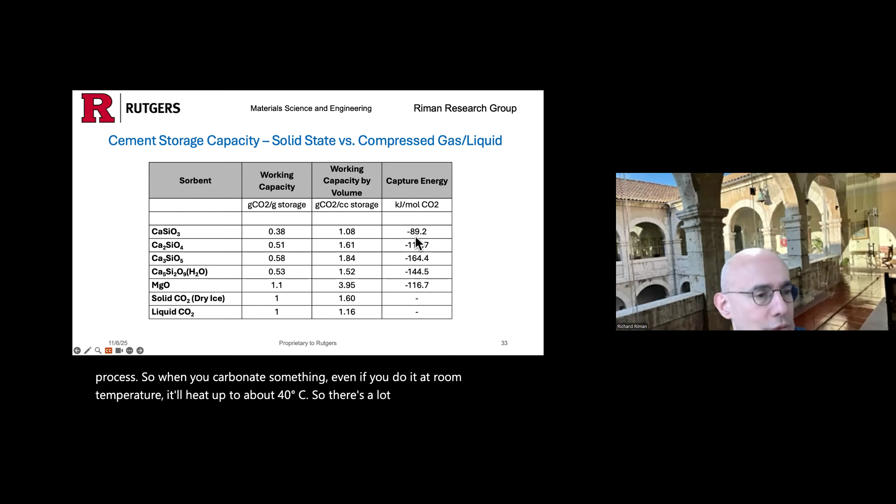The other thing is that to capture CO2, it's thermodynamically preferred. It releases a lot of heat in the process. So when you carbonate something, even if you do it at room temperature, it'll heat up to about 40 degrees C. So there's a lot of energy that's stored. And these materials are very sensitive to CO2, so you can pick up CO2 directly from the air or directly from water, as well as flue gas.

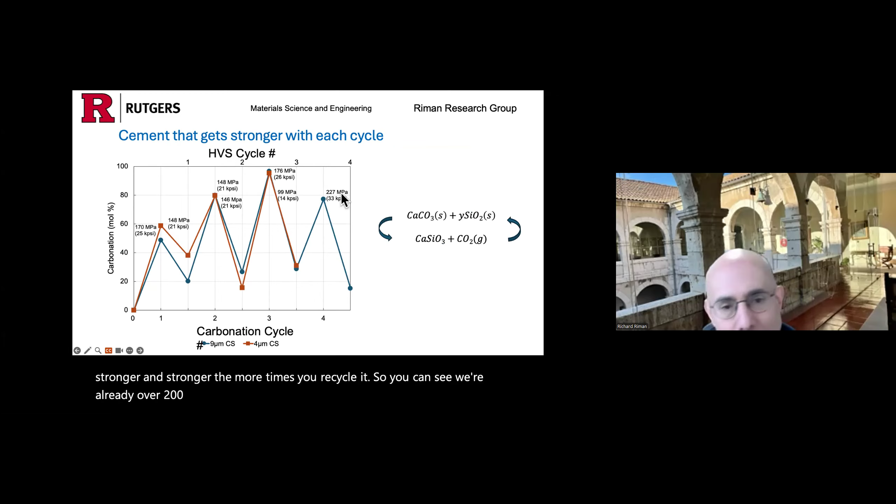And you're probably asking yourself, well, if we make the cement a couple of times, is it going to be strong? What we found is that the material gets stronger and stronger the more times you recycle it. So you can see we're already over 200 megapascals, and that's more than 3 times the strength of Portland cement.

So what's the future? The future, as I see it, is why don't we use cement to capture, store, transport, and dispense CO2? That way we can avoid having to build a $400 million CO2 processing plant. A CO2 business is also a cement business, and a cement business can also be a CO2 business.

So because our process is so simple, I would like to get this process in the hands of a lot of small business owners, because people can do either kind of business by just setting up my process and doing it. On top of that, we can use waste concrete. We don't have to necessarily use calcium carbonate and silica. So the supply chains for this raw material is going to enable us to actually fill the huge amount of material that's used for making concrete.

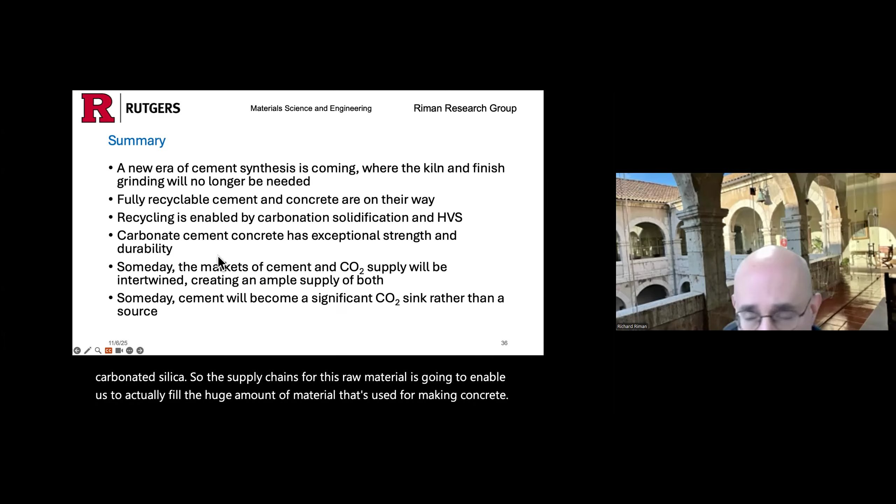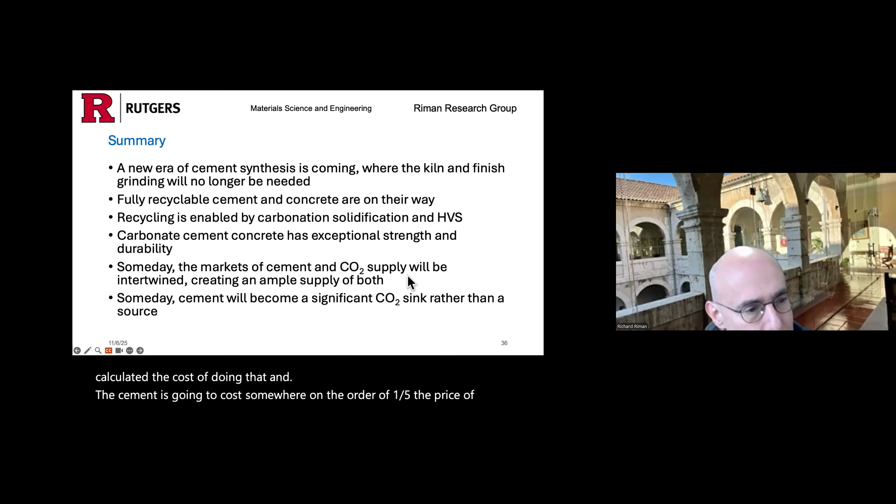And that's one of the most important things, because one of the things the cement industries can do really well is make lots of cement. But the other thing that could be done is we could have a lot more people making smaller amounts of cement and doing it everywhere, especially if they can get materials from demolition. And we've calculated the cost of doing that. The cement is going to cost somewhere on the order of 1/5 the price of Portland cement. So right now, Portland cement's going for $150 a ton. Imagine us being able to sell it for $30 a ton.

And the markets for cement and CO2 are large. If it's a simple enough process that anyone can do it, then we can create a distributed economy and make cement the largest sink of CO2 rather than being the largest emitter.